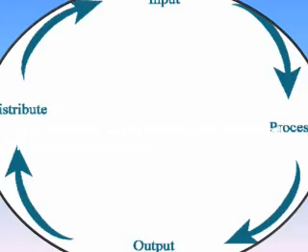As we can see in this cycle, input is given which is being processed, and afterwards we get the output which is further distributed in the atmosphere, in our environment, or in our society, which can be taken as an input and further processed. Now we are in a condition to define food processing.

Food processing is a set of methods and techniques used to transform raw ingredients into food, or to transform food into another form for consumption by humans or animals, either in the home or by the food processing industry. Basically, the food processing industry takes clean harvested crops or animal products and uses them to get attractive, marketable, and often long-shelf-life food materials utilized by humans or animals.

Now I will tell you about the history of food processing industries. Food processing dates back to the prehistoric ages when crude processing incorporated slaughtering, fermenting, sun-drying, preserving with salt, and various types of cooking. Salt preservation was especially common for food that constituted warriors' and sailors' diet until the introduction of canning methods.

Now we are going to discuss the benefits of food processing. The following are the benefits: toxin removal, preservation, easy marketing and distribution tasks, increasing food consistency, increasing seasonal availability of many foods, enabling transportation of delicate perishable foods, reducing food-borne diseases, and improving the quality of life.

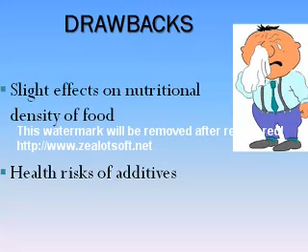The other disadvantage is the health risk of any additive, which will vary greatly from person to person. For example, sugar as an additive would be harmful to those suffering from diabetes.

Now we will discuss food processing done at commercial level. Food processing can also be done at small scales, such as in our homes, in our kitchens, in small industries. The following are the processes usually carried out at commercial level: salting, drying, pickling, fermentation, cooking and dehydration.

Firstly, we will discuss salting. Salting is the preservation of food with dry edible salt. It is related to pickling, that is, preparing food with brine.

Second, we have drying. Drying is a method of food preservation that works by removing water from the food, which inhibits the growth of microorganisms and hinders quality decay.

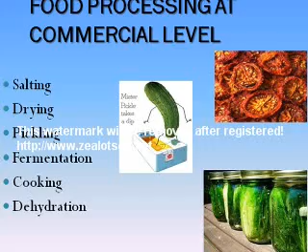Third, we have pickling. Pickling is the process of preserving food by anaerobic fermentation in brine and storing it in an acidic solution, usually vinegar, which is acetic acid, and the resulting food is called pickle.

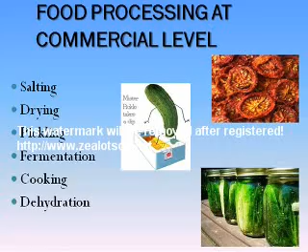Now we will discuss fermentation: the chemical breakdown of a substance by bacteria, yeast or other microorganisms, typically involving effervescence and giving off heat. Fermentation in food processing is typically the conversion of carbohydrates to alcohols and carbon dioxide or organic acids using yeast, bacteria, or a combination, under anaerobic conditions.

Food processing industry: we should first know the role of the food industry. The food industry is a complex global collective of diverse businesses that together supply much of the food energy consumed by the world population. So food processing industry is the industry involved in treating raw materials to produce foodstuffs for people.

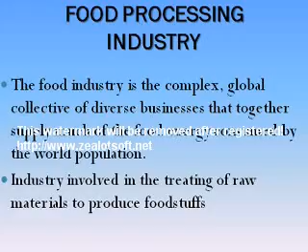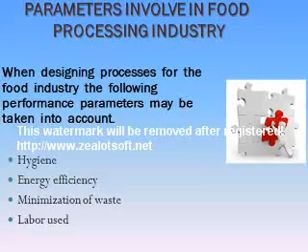Parameters involved in food processing industry: while designing processes for the food processing industry, the following performance parameters may be taken into account: hygiene, energy efficiency, minimization of waste, and labor used.

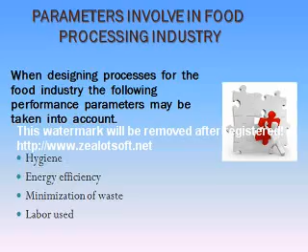Our first parameter is hygiene and health. Firstly, we will discuss hygiene. Hygiene is defined as the number of microorganisms present in a milliliter of food product, with the rigorous application of industry and government endorsed standards to minimize possible risk and hazards. The international standard adopted today is HACCP.

Health: fat content is reduced in the final product. Example: by using baking instead of deep frying in the production of potato chips, which is another processed food.

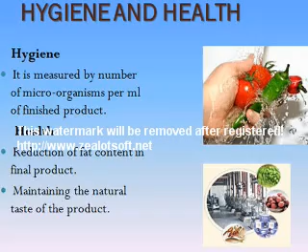Second is maintaining the natural taste of the product, for example, by using less artificial sweetener than used before.

The second parameter is efficiency. There are basically two points necessary in maintaining the efficiency of a food processing industry: first, rising energy costs; second, factory automation systems.

Rising energy costs led to increasing usage of energy saving technologies, for example, frequency converters on electric drives, heat insulation of factory buildings and heated vessels.

Second is factory automation systems, also known as distributed control systems. It reduces personnel costs and may lead to more stable production results, meaning that we get very good and great profit.

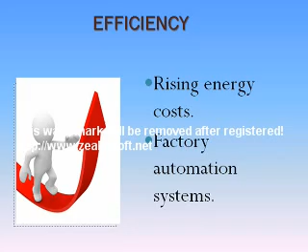Thank you, Fiza. Now I will proceed. The third parameter involved in food processing industry is waste minimization. It is the process and policy of reducing the amount of waste produced by a person or a society, minimizing resource and energy use during manufacture.

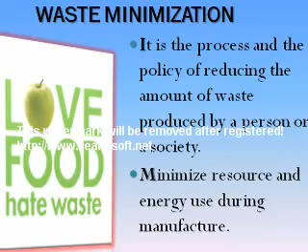And the last is labor used. Labor used is measured by the number of working hours per ton of finished product.

Now I will tell you about different food processing industries: cannery, fish processing, industrial rendering, meat packing plant, slaughterhouse, sugar industry, and vegetable packing plant.

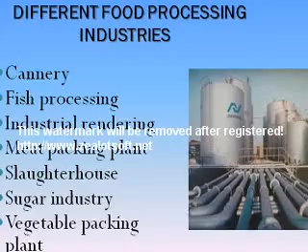First we have the cannery industry. Canning is a method of preserving food in which the food contents are processed and sealed in an airtight container. Canning provides a typical shelf life ranging from 1 to 5 years, although under specific circumstances, a freeze-dried canned product can last as long as 30 years in an edible state.

Seams provide an airtight seal to the tin can. Here we have two operations in canning.

First operation: once brought together in a seamer, the seaming head presses a first operation roller against the end curl. The end curl is pressed against the flange, curling downward around the body and under the flange. The flange is also bent downward, and the end and body are now loosely joined together.

The first operation roller is then retracted. At this point, 5 thicknesses of steel exist in the seam. From the outside in they are end, flange, end curl, body and countersink.

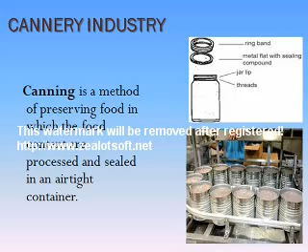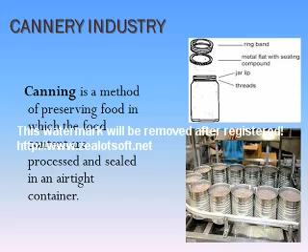In the second operation, the seaming head engages the second operation roller against the partially formed seam. This presses all 5 steel components together tightly to form the final seal. The 5 layers in the final seam are then called end, body hook, cover hook, body and countersink.

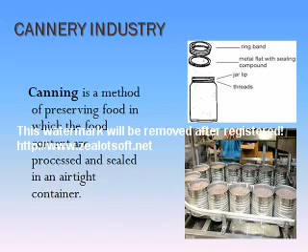All sanitary cans require a filling medium within the seam, because otherwise the metal-to-metal contact will not maintain a hermetic seal. In most cases, a rubberized compound is placed inside the anchor radius forming the critical seal between the end and the body. Probably the most important innovation since the introduction of double seams is the welded side seam.

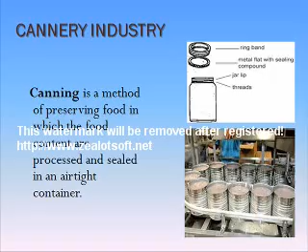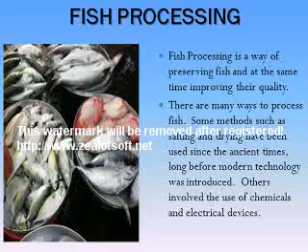Next we have the fish processing industry. The term fish processing refers to the processes associated with fish and fish products between the time fish are caught or harvested and the time the final product is delivered to the customer. Fish processing is a way of preserving fish and at the same time improving their quality.

There are many ways to process fish. Some methods, such as salting and drying, have been used since ancient times, long before modern technology was introduced. Others involve the use of chemicals and electrical devices.

There are 4 factors which affect fish processing. Number 1, control of temperature. Number 2, physical control of microbial load. Number 3, chemical control of microbial loads. And number 4, control of oxidation-reduction potential.

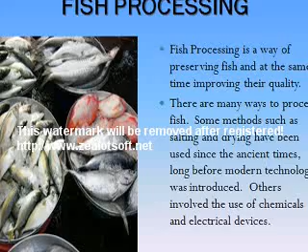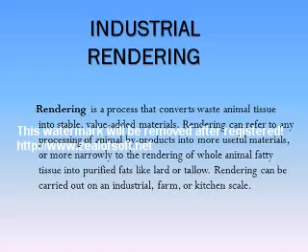Next is industrial rendering. Rendering is a process that converts waste animal tissues into stable value-added materials. Rendering can refer to any processing of animal byproducts into more useful materials, or more narrowly to the rendering of whole animal fatty tissues into purified fats like lard or tallow. Rendering can be carried out on an industrial, farm or kitchen scale.

There are 2 types of rendering process. Number 1 is rendering processes for edible products. Edible rendering processes are basically meat processing operations and produce lard or edible tallow for use in food products. Edible rendering is generally carried out in a continuous process at low temperature.

The other is rendering processes for inedible products. Materials that for aesthetic or sanitary reasons are not suitable for human food are the feedstocks for inedible rendering processes. Much of the inedible raw material is rendered using the dry method. This may be a batch or a continuous process in which the material is heated in a steam-jacketed vessel to drive off the moisture and simultaneously release the fat from the fat cells.

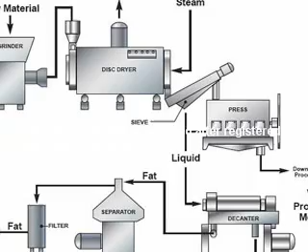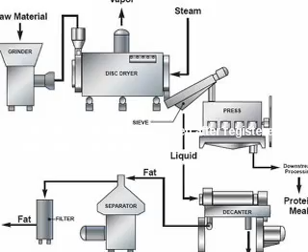Here we have a flow diagram of rendering. Raw material is taken into the grinder, then sent into a disc dryer, where it is evaporated with the help of added steam. Then it is brought into a press. From downstream processing, protein meal is obtained. On the other hand, liquid from the press goes into a decanter. From the decanter, fat is taken into a separator, where it is filtered and fats are obtained.

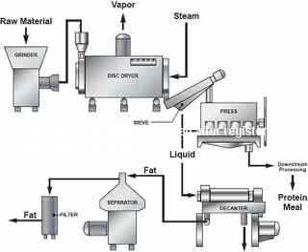Next we have the meat packing industry. The meat packing industry handles the slaughtering, processing and distribution of animals such as cattle, pigs, sheep and other livestock. The industry is primarily focused on producing meat for human consumption, but it also yields a variety of byproducts including hides, feathers, dried blood, and through the process of rendering, fats such as tallow and protein meals such as meat and bone meal.

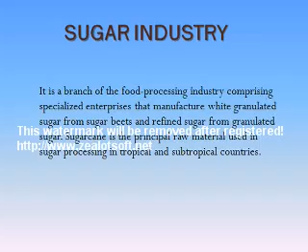Lastly, we have the sugar industry. It is a branch of the food processing industry comprising specialized enterprises that manufacture white granulated sugar from sugar beets and refined sugar from granulated sugar. Sugarcane is a principal raw material used in sugar processing in tropical and subtropical countries.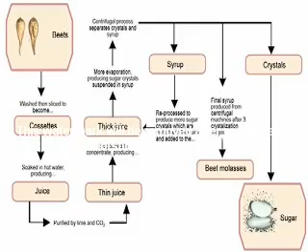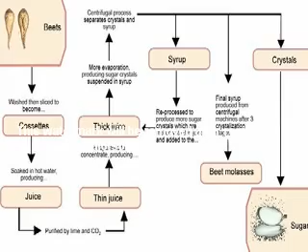Here we can see the process of sugar formation in this flow diagram, where beets are taken and washed, then sliced to become cossettes that are soaked in hot water, resulting in juice that is purified by lime. The juice is thickened, and evaporation is done to get sugar crystals suspended in syrup. By the centrifugal process, the crystals and syrup are separated, and the crystals obtained are the sugar.